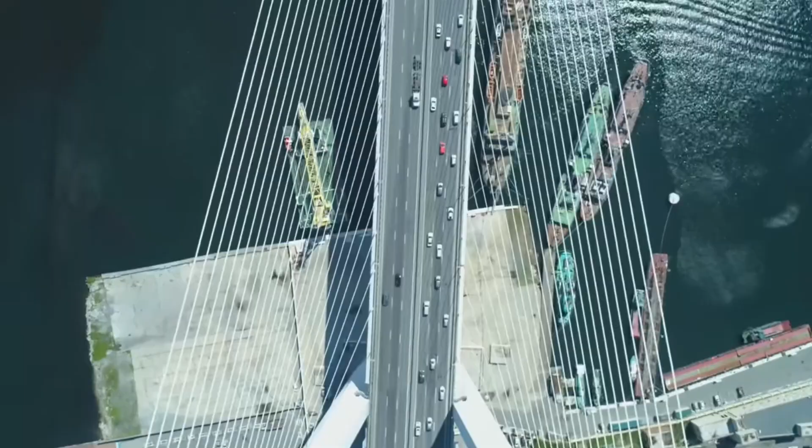While the world marveled at bridges and skyscrapers, Japan quietly did the unthinkable. It built a tunnel beneath the ocean that defied earthquakes, outlasted typhoons, and stunned billions.

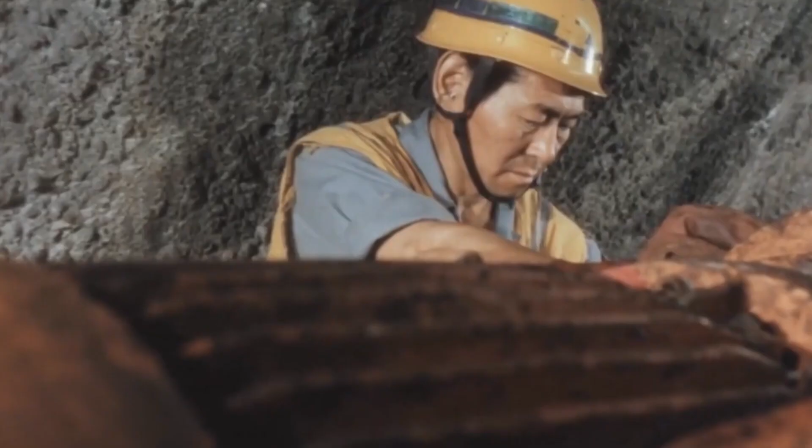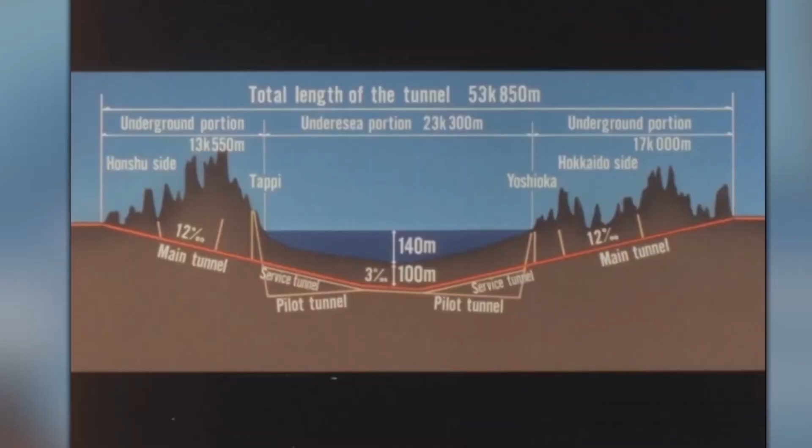Across the globe, engineers have tested the limits of what's possible, striving to defy the natural world and reshape the landscape. But in Japan, a nation shaped by the sea and forged by innovation, one underwater tunnel project has stunned the world with its audacity, technical brilliance, and unyielding precision.

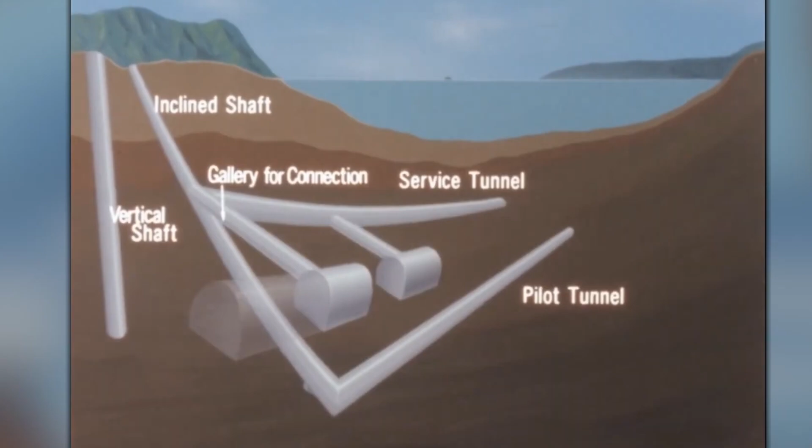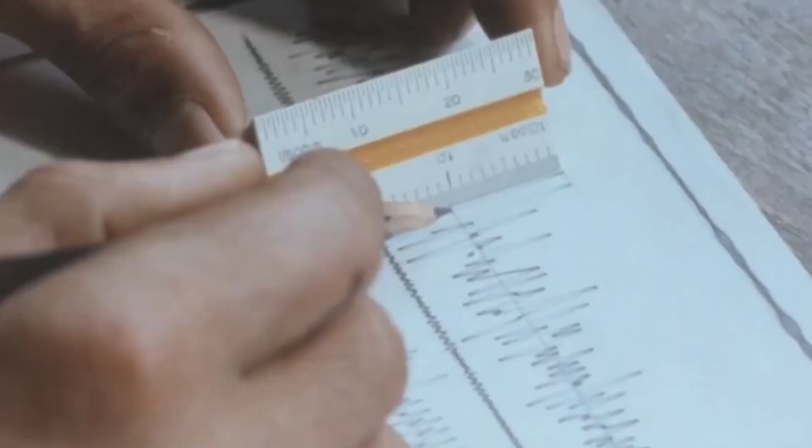At the heart of this visionary endeavor lies the ambition to connect islands, not with ferries, not with bridges, but with a permanent artery beneath the ocean itself. The idea was simple in its conception yet monumental in its execution. A tunnel that would span beneath the waves, allowing people and goods to traverse the ocean floor safely and seamlessly. This project is not just about connecting islands, it's about crafting a legacy, one that would endure the forces of nature and become a symbol of mankind's unwavering will to push the boundaries of possibility.

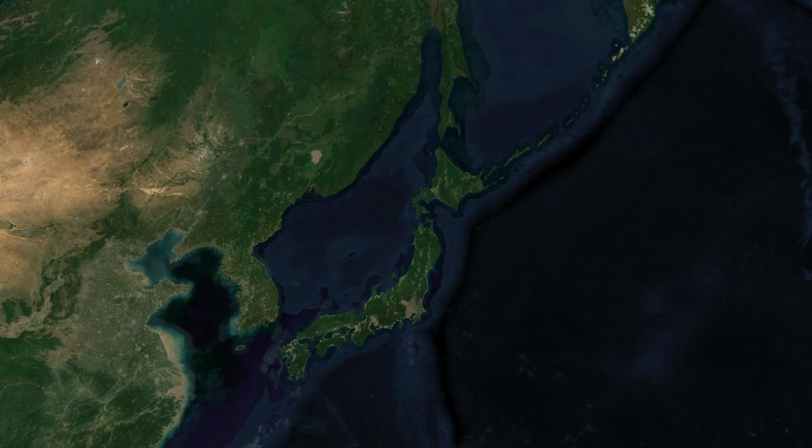This is unbelievable, but this ambition became a reality with the Seikan Tunnel, which connects the islands of Honshu and Hokkaido. Stretching over 53 kilometers, with 23.3 kilometers of it running beneath the seabed, the Seikan Tunnel was a groundbreaking achievement that stunned the world with its engineering precision and resilience.

The tunnel was built to withstand the seismic activities in the region and severe weather conditions, including typhoons, challenges that were carefully planned throughout its design and construction.

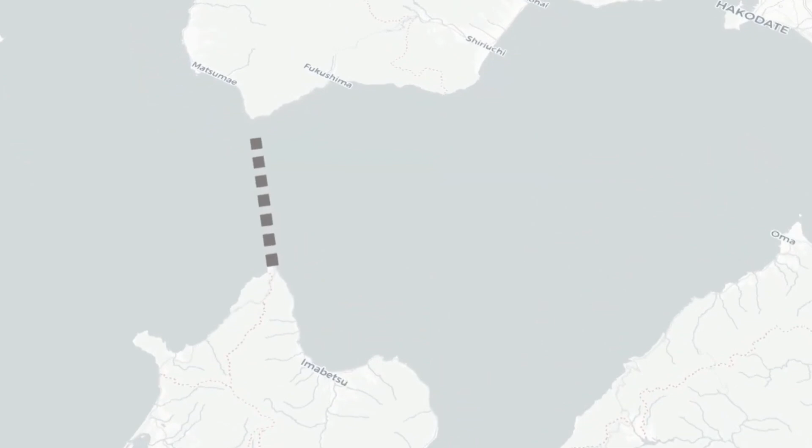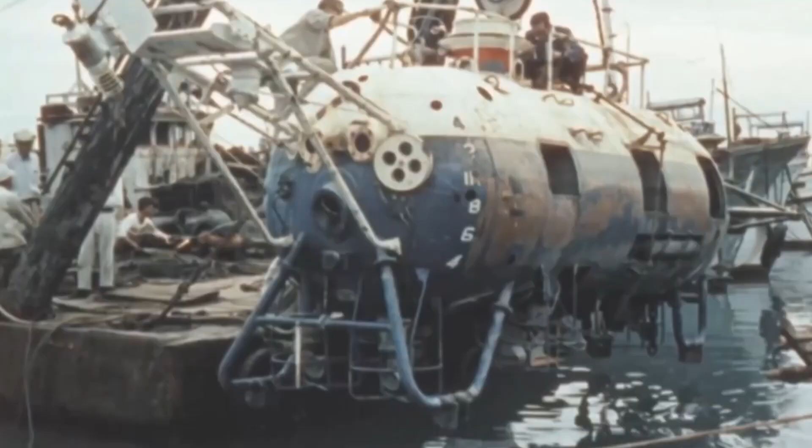Construction of this marvel did not begin with the familiar steel and concrete that often dominates monumental projects. No, this tunnel's foundation was forged in the unseen and uncharted depths of the ocean. The first step was not a matter of physical construction, but of understanding the very environment where this tunnel would rise from the ocean floor.

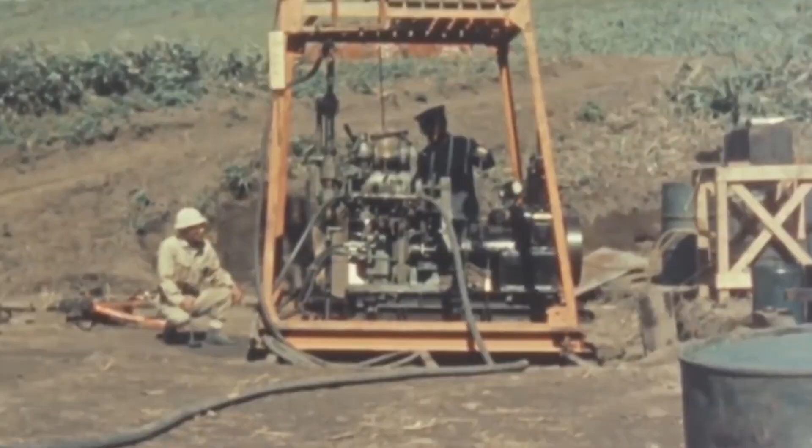Engineers and marine scientists embarked on an exhaustive campaign of surveying, utilizing advanced sonar systems, unmanned aerial drones, and state-of-the-art deep-sea robots. Together, these tools mapped the ocean floor in intricate detail, capturing every nuance of the seabed, every rock formation, every current, every sediment layer.

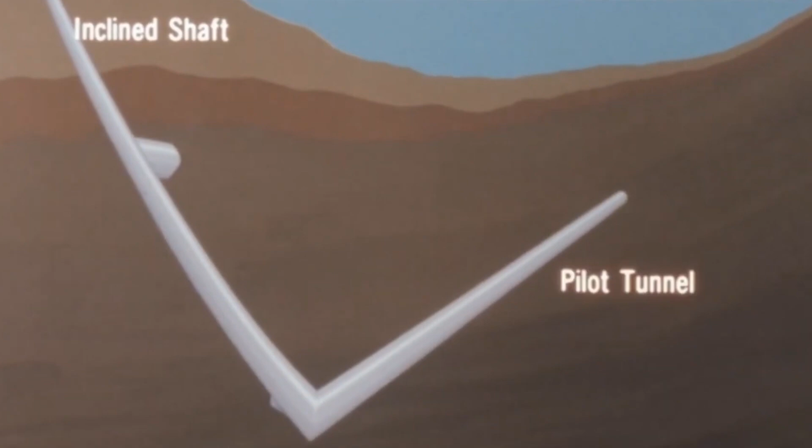The task was far from easy. The seabed, once mysterious and untamed, had to be transformed into a meticulously studied blueprint. It was only through the seamless integration of cutting-edge technology and years of research that the engineers could pinpoint the exact locations for the tunnel's foundations. This process of mapping the ocean floor was painstaking, but it laid the groundwork for what would become one of the most daring feats of engineering history.

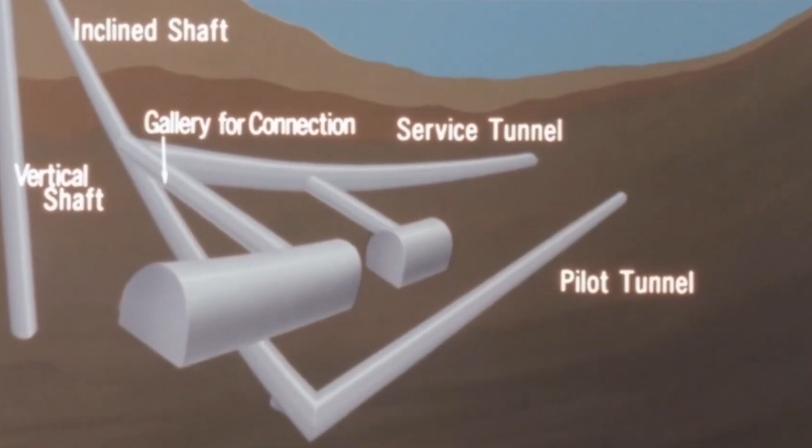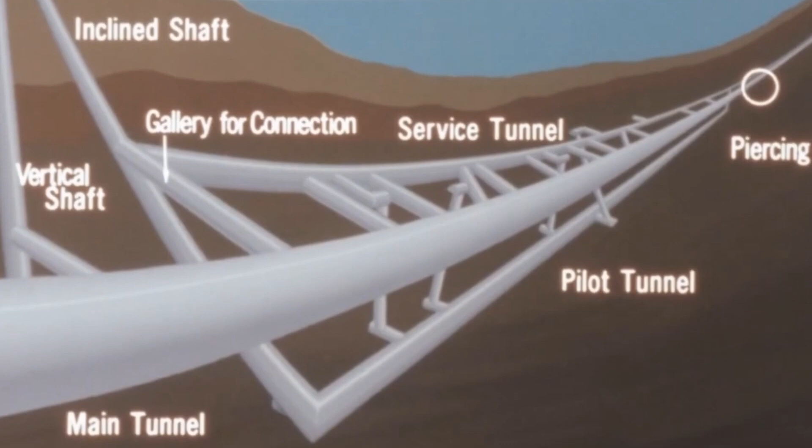Then came the first daring and bold move in this unprecedented project: laying the foundations on the seabed. The procedure, though seemingly simple, was a monumental task requiring flawless execution and a deep understanding of the forces at play beneath the waves. The engineers used massive barges to transport prefabricated tunnel segments, each one a work of art in its own right, designed not just for strength but for stability in the harsh underwater environment.

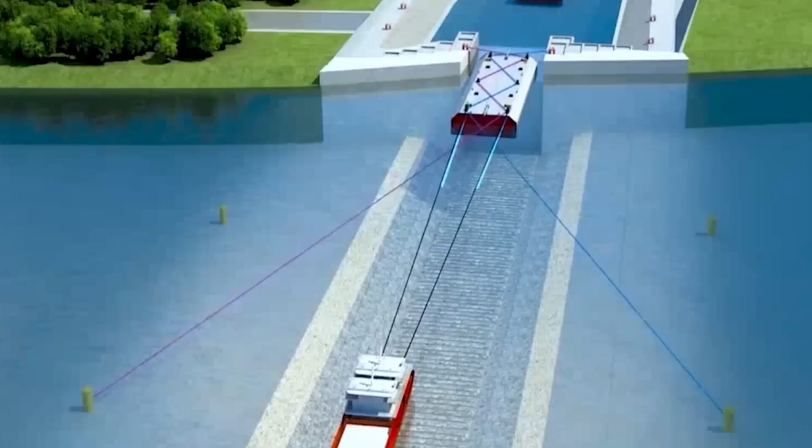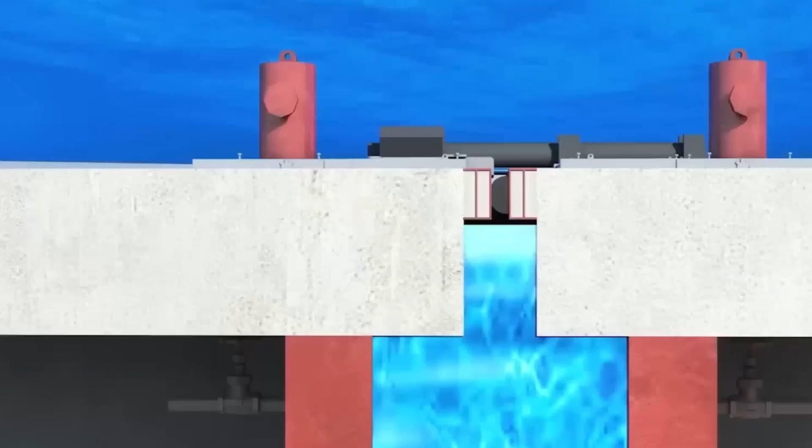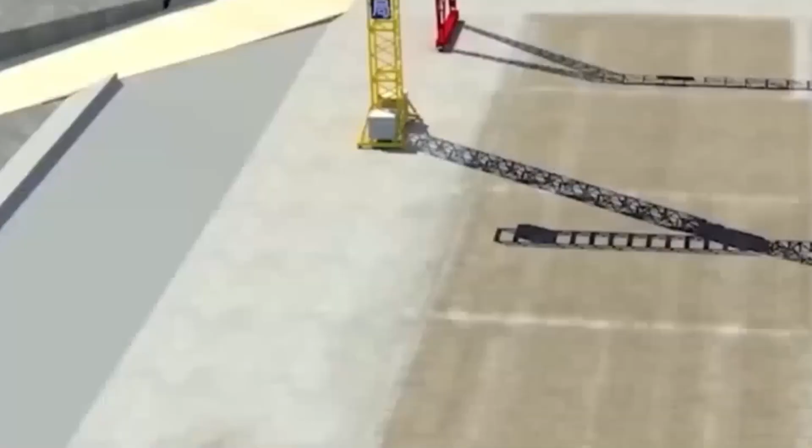Once the tunnel segments were ready, they were carefully lowered by cranes with laser-guided precision. The deployment was orchestrated by a team of expert divers, working in tandem with cutting-edge systems and high-tech laser equipment. They guided the heavy segments as they descended toward the ocean floor, ensuring that each one was placed with millimeter precision. It wasn't just about getting the segments in place, it was about perfecting the alignment, ensuring that the entire tunnel would sit flush with the foundations, ready to withstand the immense pressure of the surrounding ocean.

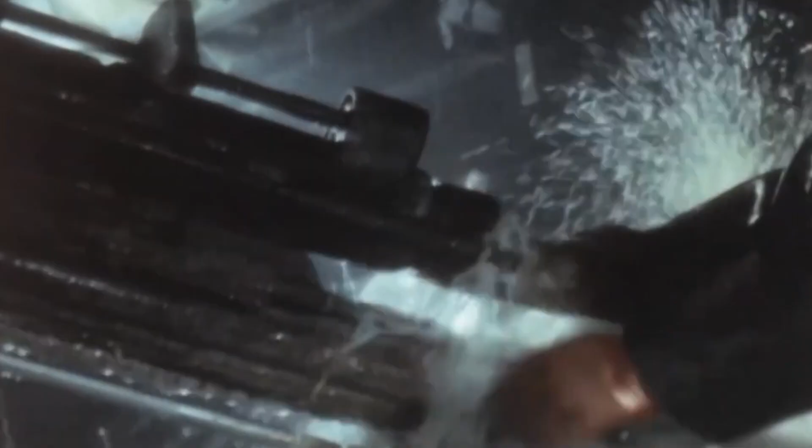The operation was nothing short of a spectacle. From above, the barges appeared as colossal creatures, slowly sinking beneath the surface with tunnel segments hanging from their massive hooks. Below, the divers swam gracefully alongside, their movements deliberate, each one part of an intricate choreography of precision. Every piece of machinery, every human action, worked in harmony as the world watched in awe. This was the moment where the ocean ceased to be an obstacle and became the very foundation of human innovation.

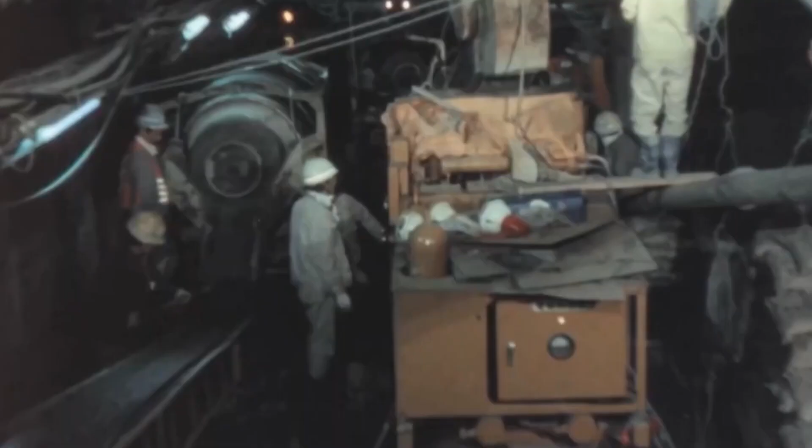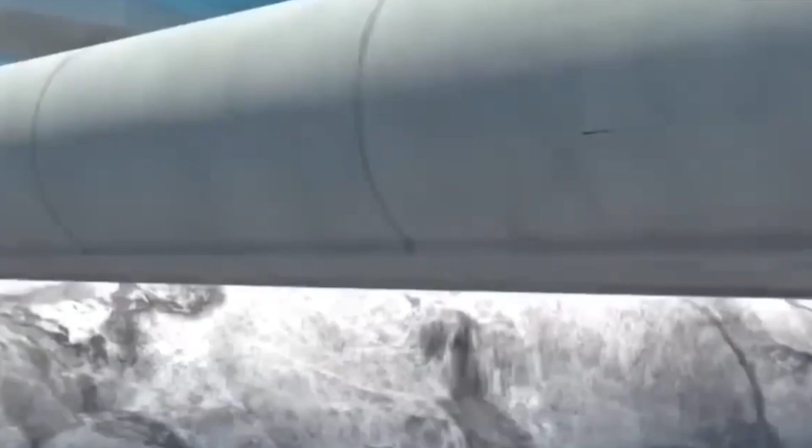Through tireless teamwork and unwavering precision, the foundations were set, each tunnel segment perfectly aligned on reinforced platforms at the bottom of the sea. What had once been an alien landscape of shifting sand and rocky outcrops was now a carefully controlled and methodically arranged base for a tunnel that would span the ocean's depths for decades to come.

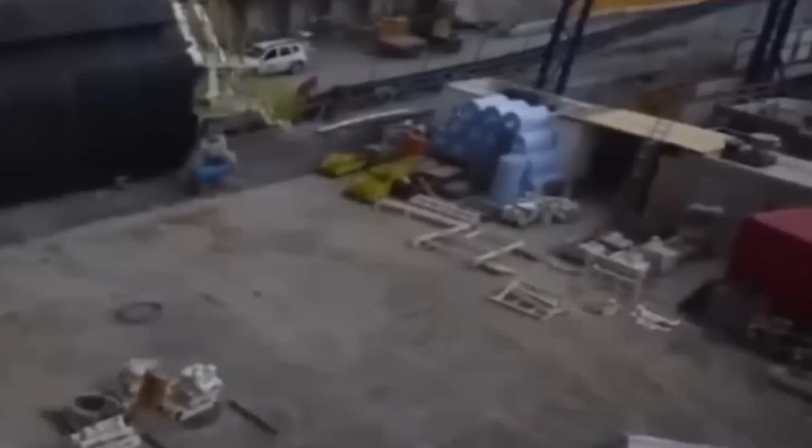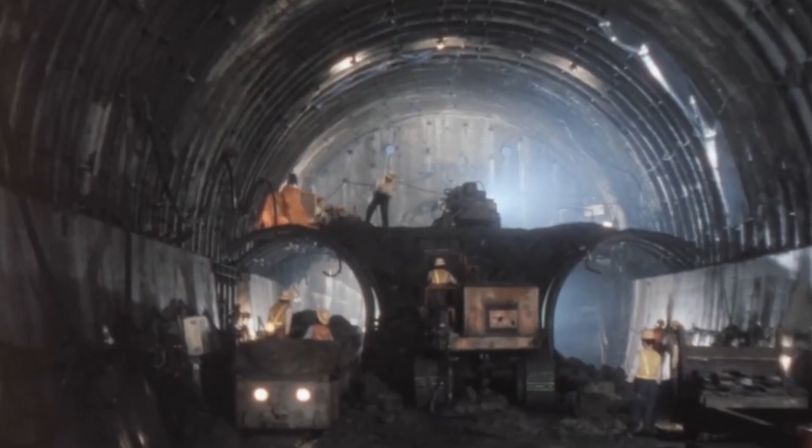As Japan's Seikan Tunnel proved, the foundation of such an engineering marvel had to be carefully laid out to endure the rugged and unpredictable nature of the ocean. The construction began with the installation of the tunnel's tunnel boring machine, which worked tirelessly through the hard rock and sandy seabed. The tunnel segments were prefabricated and then transported by rail to the tunneling site, where each segment was carefully aligned and assembled.

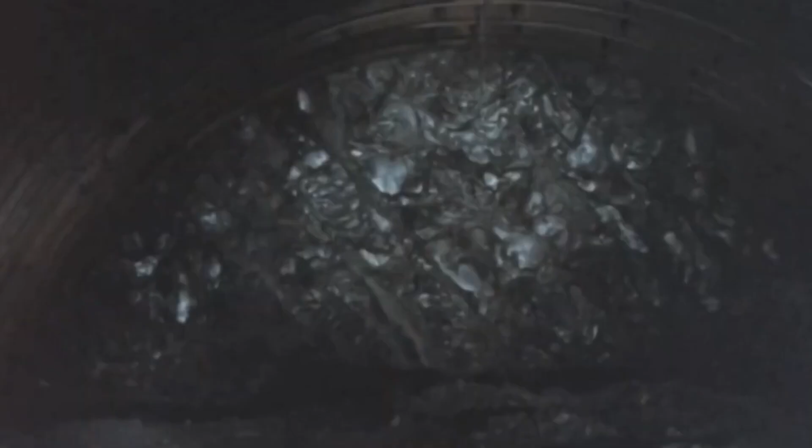As the pieces of the tunnel were submerged and aligned, engineers applied a meticulous process to ensure the structure's endurance over time. Waterproof seals, made from advanced synthetic materials, were placed at the joints where each section met.

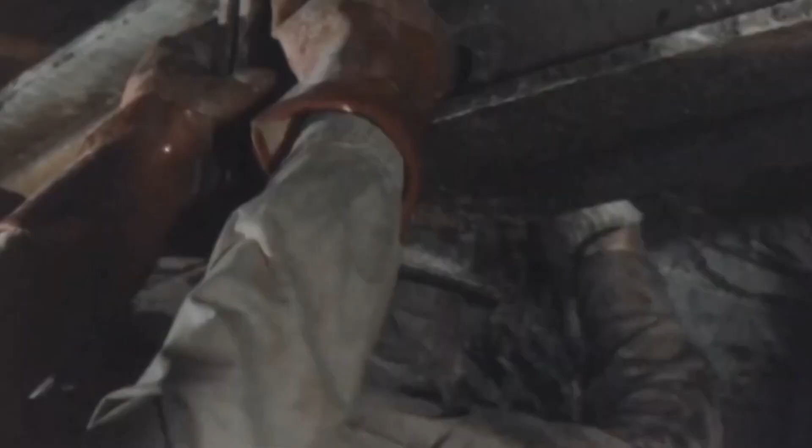These seals formed an impermeable barrier, designed not only to withstand the corrosive salt water that relentlessly batters the ocean floor, but also to guard against the crushing pressures that build up deep beneath the waves.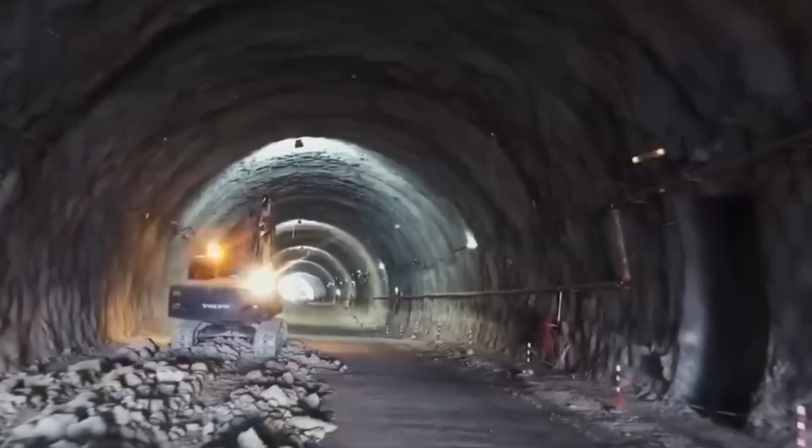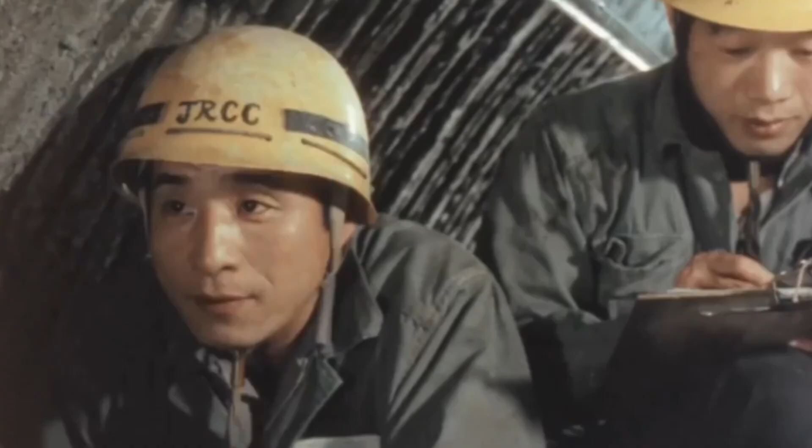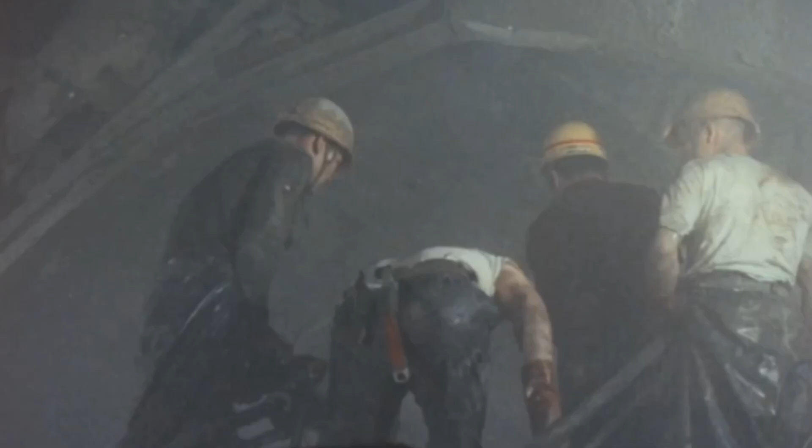The next layer of protection came in the form of corrosion-resistant concrete, specially engineered to endure constant exposure to the sea's volatile elements. This concrete was a sophisticated blend of polymers and silica formulated to ensure longevity and resilience against the powerful forces of nature. The concrete was applied in layers, enveloping the tunnel's structure like armor, preserving its integrity for decades to come. With each application, the material bonded with the underlying surface, creating a seamless, unified shield.

But a tunnel is not just a structure, it is a vital lifeline. A symbol of progress and innovation that carries with it the promise of connection and convenience for future generations. Beyond its sturdy exterior, the tunnel is a living, breathing system designed to stand the test of time.

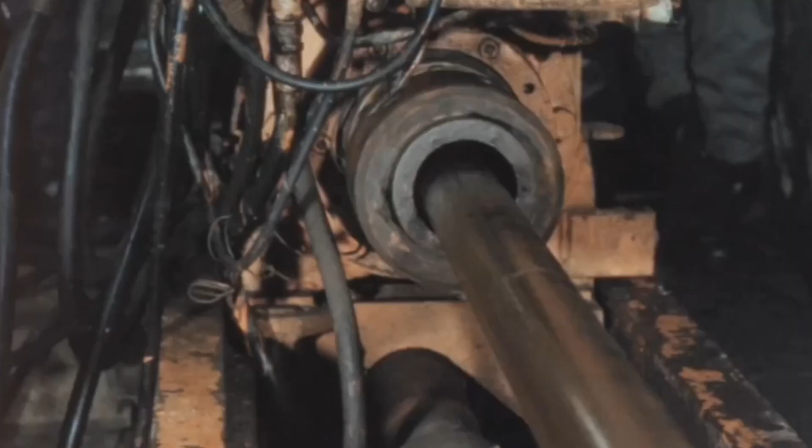Once the external structure was in place, the focus shifted inward. Inside the sealed shell, engineers meticulously installed the systems necessary to make the tunnel a fully functional passageway for vehicles and passengers. These weren't mere pipes and wires. They were intricate veins and arteries of the tunnel, ensuring its smooth operation for years to come.

State-of-the-art lighting systems were installed, providing illumination throughout the tunnel to guide travelers through its depths. The lighting was not only functional, but strategically designed to create an environment that would be both welcoming and practical.

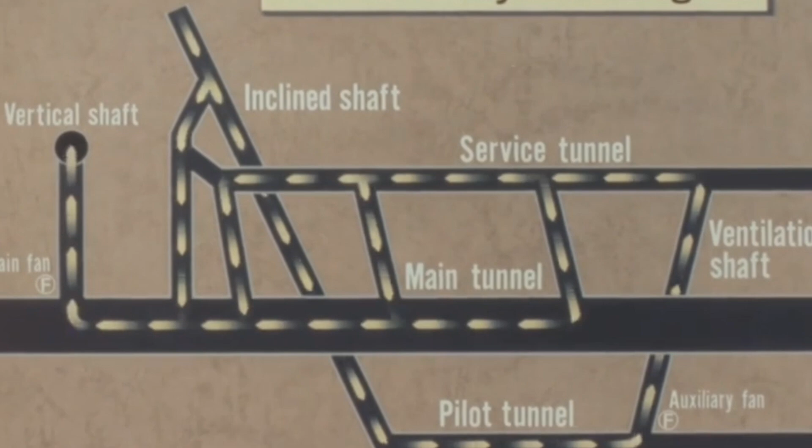A crucial part of this tunnel's design was its ability to react and adapt to changing conditions. Engineers installed a network of redundant sensors, each one designed to monitor a different aspect of the tunnel's operations.

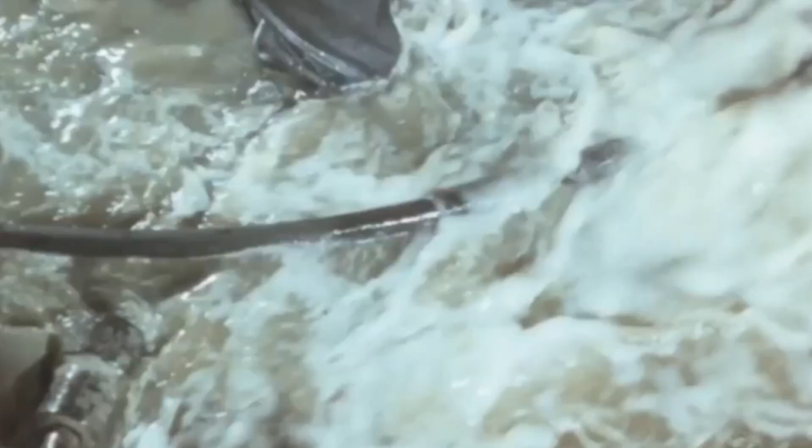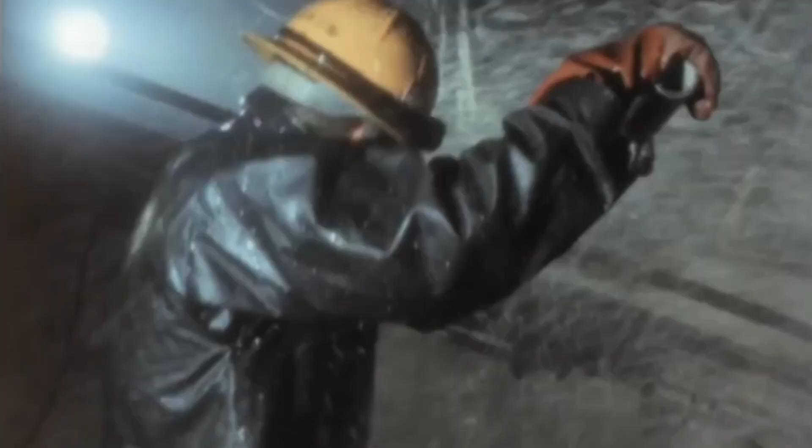These sensors tracked air quality, ensuring that the tunnel maintained breathable conditions. They also monitored water leakage, detecting even the smallest breaches in the waterproof barriers. Structural integrity was continuously assessed by sensors embedded within the concrete, which provided real-time data to engineers monitoring the tunnel's performance. Additional sensors tracked vehicle flow, ensuring that the tunnel could accommodate the growing demands of future transportation without compromising safety or efficiency.

The tunnel was more than a mere passage. It was an intelligent, self-regulating environment that anticipated needs and responded to challenges before they could become problems.

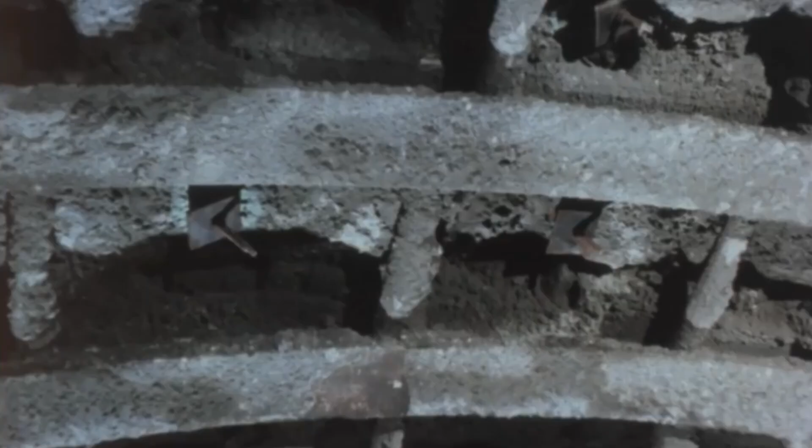No great feat of engineering is complete without rigorous testing, and this tunnel was no exception. The final test was as ambitious as the project itself.

Simulated earthquakes, generated by applying external pressure at varying intensities, were used to evaluate the tunnel's ability to withstand seismic activity. It wasn't enough to simply build a tunnel that could survive under normal conditions. This tunnel had to be capable of withstanding the worst that nature could throw at it.

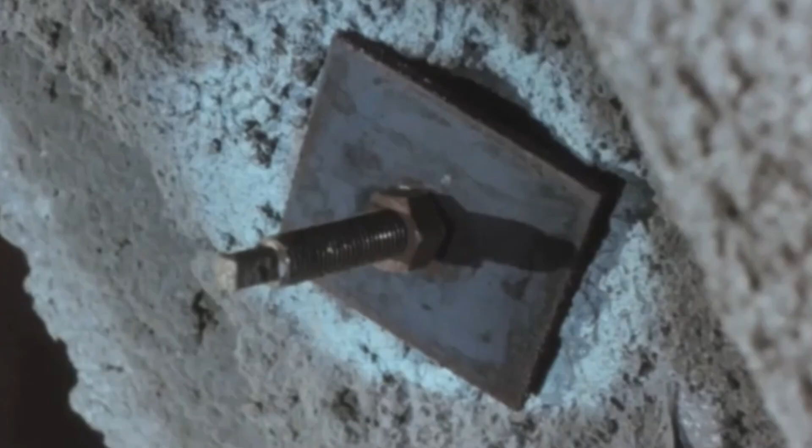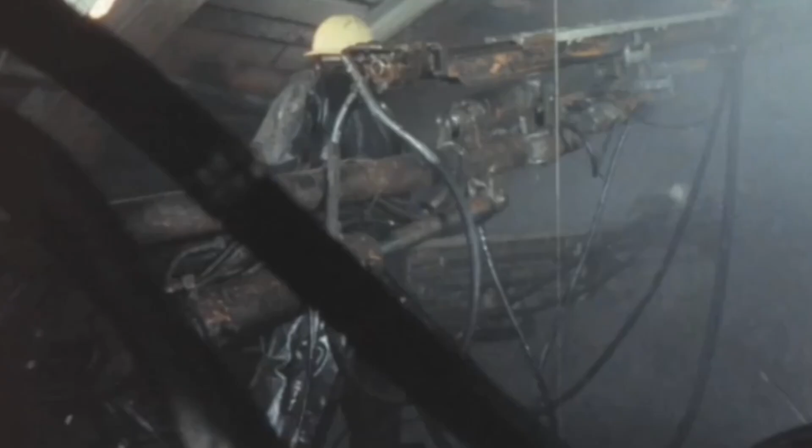As the tremors coursed through the tunnel, the structure flexed, bending and shifting under the pressure, but never breaking. It responded with the quiet resilience of a living organism adapting to the forces around it. The structure held firm, its joints and seals remaining intact as it absorbed the shocks with ease. It was a testament to the tunnel's design and durability, proof that it could withstand the unpredictable nature of the ocean and the powerful forces of the Earth's crust.

When the final test was complete, the results were conclusive. The tunnel had passed every challenge with flying colors. It was more than just a structure of stone and steel. It was a modern marvel, capable of withstanding the test of time, natural disasters, and the ever-evolving needs of future transportation.

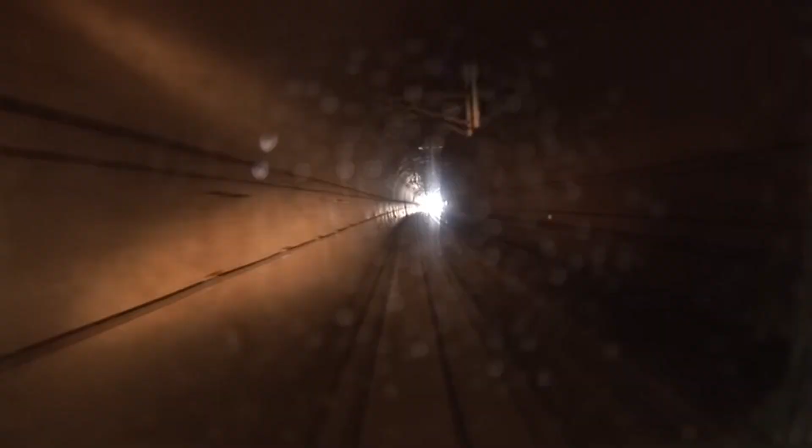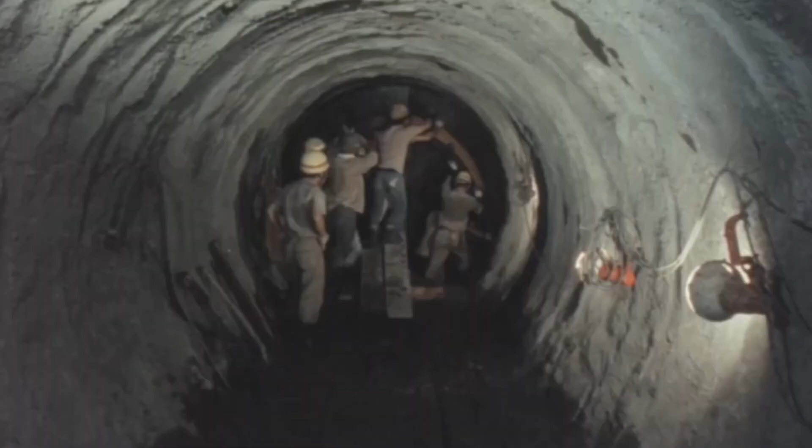More than a feat of engineering, it reflects Japan's commitment to overcoming the natural challenges posed by its geography, its archipelagic structure, and susceptibility to seismic activity. Built to withstand earthquakes, typhoons, and the test of time itself, this tunnel stands as a testament to Japan's resilience in the face of nature's unpredictable forces.

Climate change has accelerated the need for more sustainable, adaptable infrastructure. The tunnel serves as both a practical solution to an ever-expanding transportation network and a visionary answer to the future of urban mobility in a world increasingly defined by environmental challenges.

What was once regarded as an impossible dream is now a thriving artery of movement. Beneath the waves, it hums with life, a metaphor for Japan's persistent drive to innovate, redefine the limits of possibility, and position itself at the forefront of the global engineering landscape.

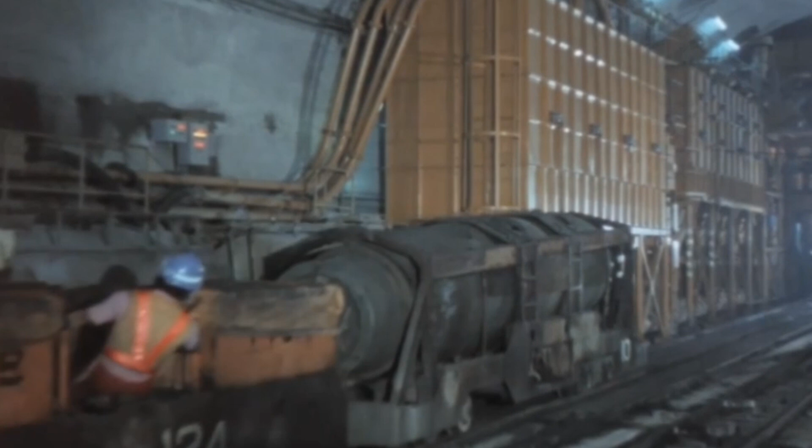This tunnel does more than connect two distant points. It intertwines the destinies of Japan's islands, fosters economic growth, and embodies a harmonious balance between technology and nature. It is quite literally a beacon of modern Japan, guiding the nation toward a future that is both sustainable and interconnected. Japan's underwater tunnel is merely one chapter in the country's rich legacy of engineering marvels.

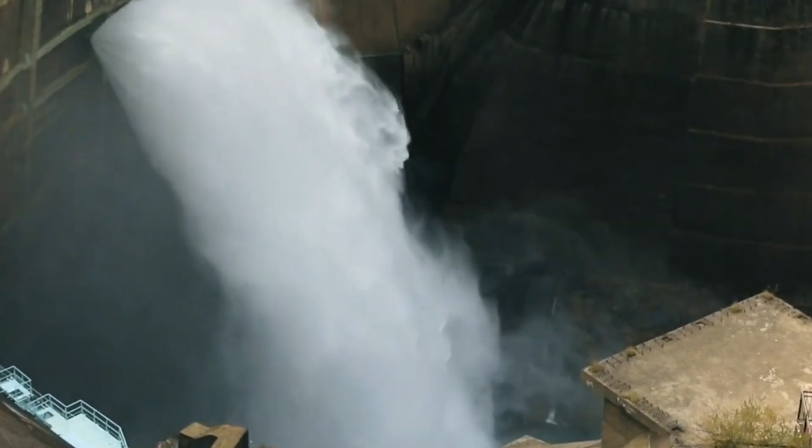The same ingenuity that made this tunnel a reality can be seen in Japan's mastery of other large-scale projects, from the breathtaking bridges that span its storm-swept bays to the dams that tame the fierce rivers cutting through its mountains. These structures speak to a nation that has long understood the necessity of turning geographic adversity into architectural triumph.

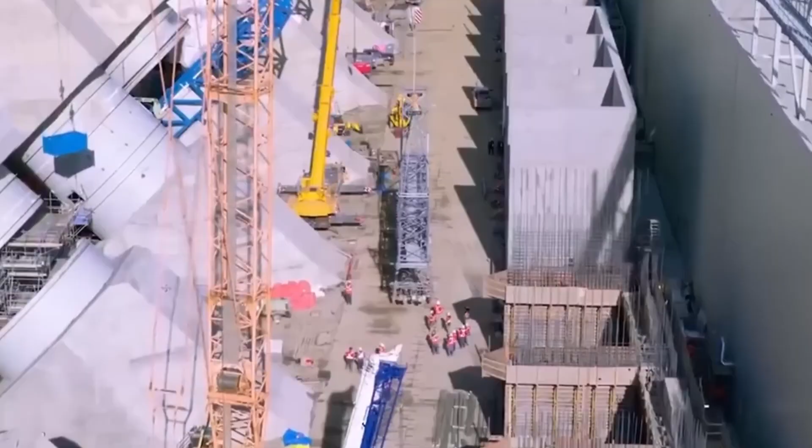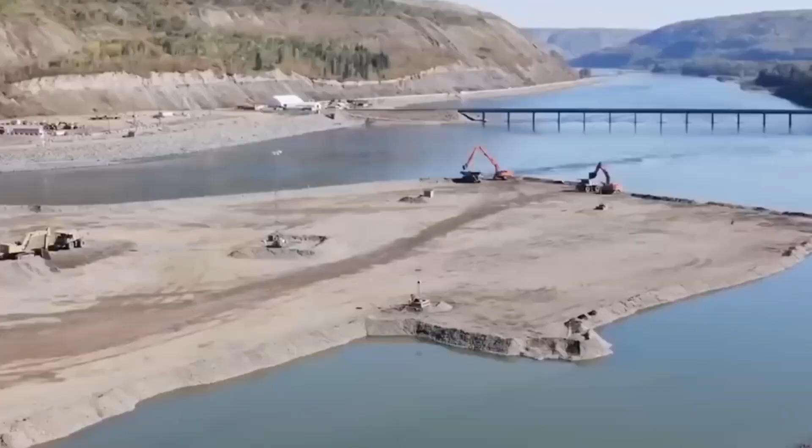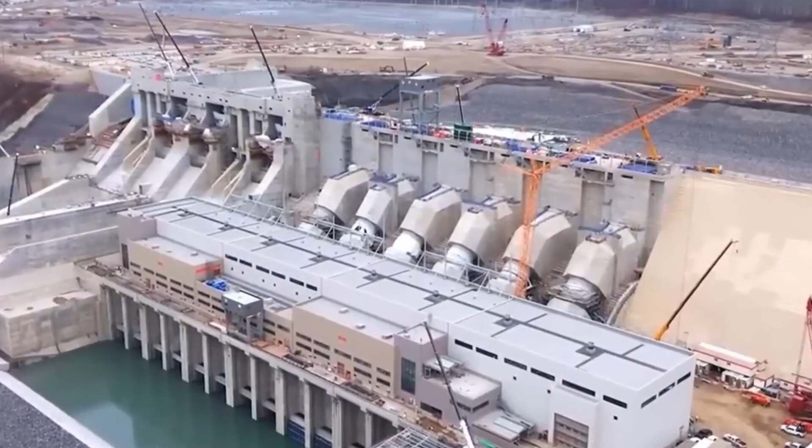Consider Japan's innovative approach to dam construction, a process that mirrors the ingenuity required for its underwater tunnel. Before a dam can be built, the force of nature must be diverted. Temporary barriers are strategically placed to control the flow of turbulent rivers, creating a dry foundation for the construction of the dam. Workers then carve out stable, solid ground, laying the groundwork for what will become a massive, indomitable structure.

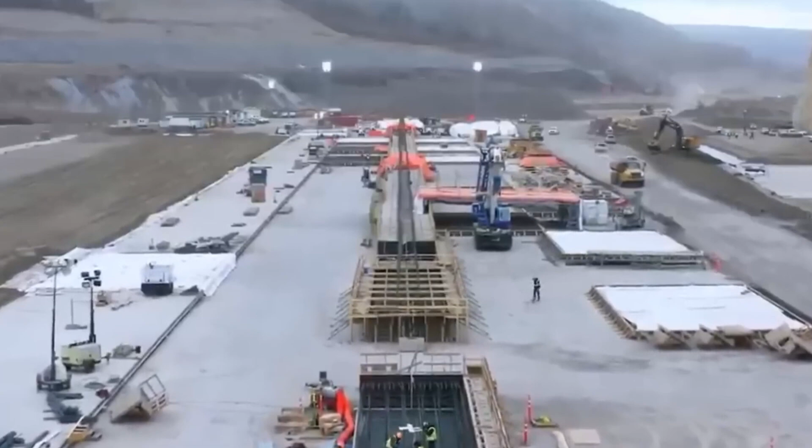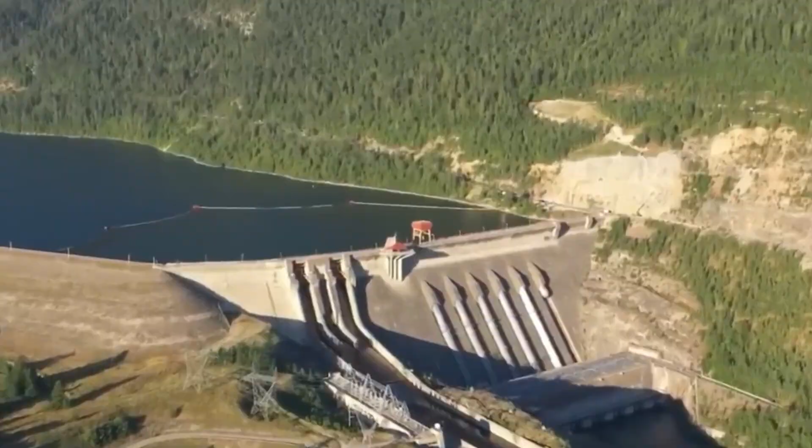The dam's body begins to take shape with the placement of massive concrete blocks, each one meticulously designed to withstand the unimaginable pressure of thousands of tons of water. These blocks are lowered into place with precision, aligning perfectly to form a seamless, enduring structure that stands as both an engineering marvel and a safeguard for surrounding communities.

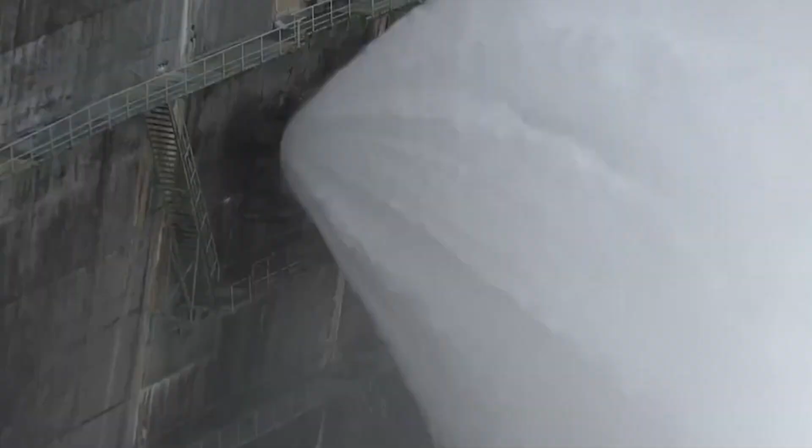Once complete, the dam is transformed into a source of power. Turbines and drainage systems are installed to harness the energy of the flowing water, turning what was once a barrier into a powerhouse of clean, renewable energy.

This transformation of nature into infrastructure is more than just a construction process. It's a reflection of Japan's relationship with its environment. The nation has continually sought to work with, rather than against, the forces of nature, creating systems that are as resilient as they are functional.

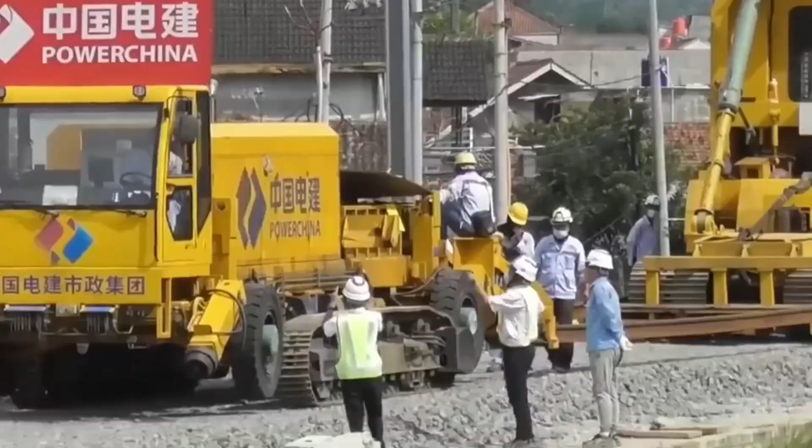Whether it's the massive concrete pillars of a bridge that sways gracefully with the winds, or the tunnel that resists the shifting tectonic plates beneath the ocean, Japan's engineering feats serve as a reminder of what can be achieved when human innovation meets nature's challenges head-on. Through projects like these, Japan has proven time and again that even in the face of the harshest geographical conditions, engineering excellence can not only survive, it can thrive.

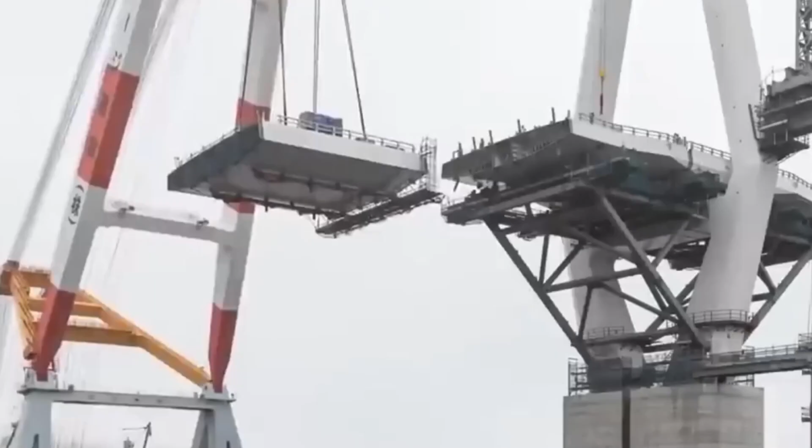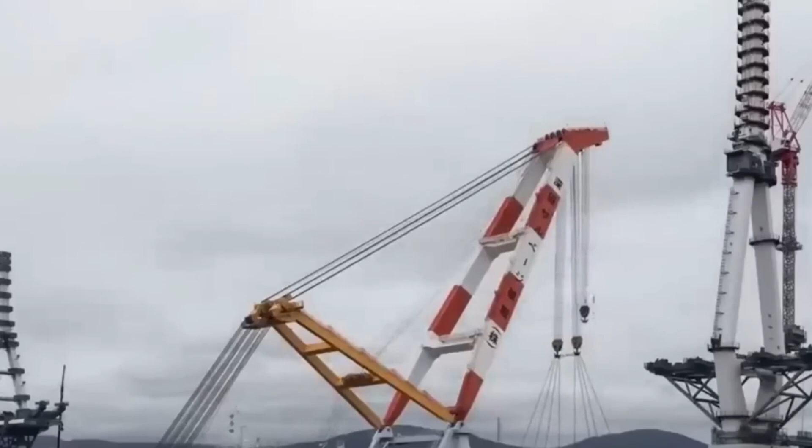Modern bridges in Japan are no less extraordinary. Deep in the seabed, foundation piles are driven with seismic isolation systems built in. Towering piers rise next, followed by steel beams and tension cables, laid with help from robotic cranes. Each bridge is an exercise in balance, distributing wind, water, and weight into a fluid aerodynamic whole.

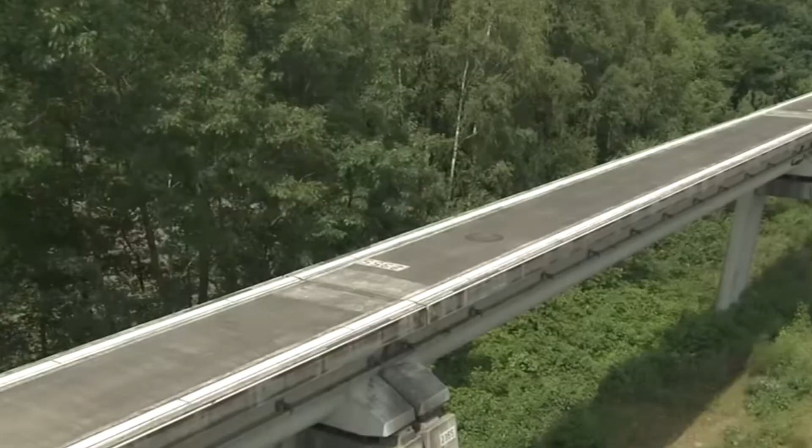Inland, Japan's rail construction exemplifies speed and accuracy. Machines now lay track with near total automation. Rails are positioned, fastened, and secured with laser-guided precision, reducing labor costs and increasing safety. These systems have turned weeks of work into hours and have become global benchmarks in transportation.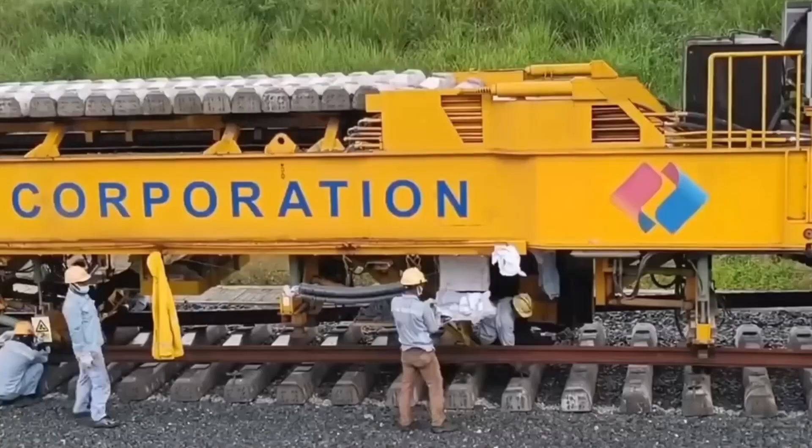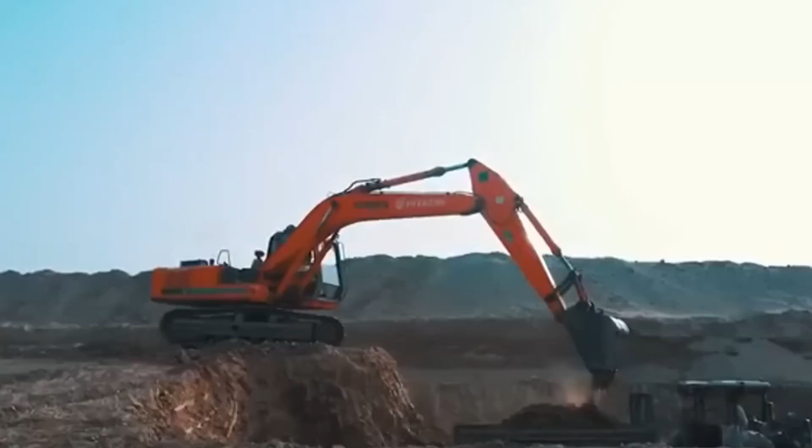River projects too are approached with harmony in mind. Water is temporarily diverted, foundations are set, and reinforced structures guide the flow with sensors and automation keeping constant watch. Roads follow a similar path. Sublayers are compacted, asphalt is poured and rolled, and safety infrastructure is added, all using environmentally considerate technologies.

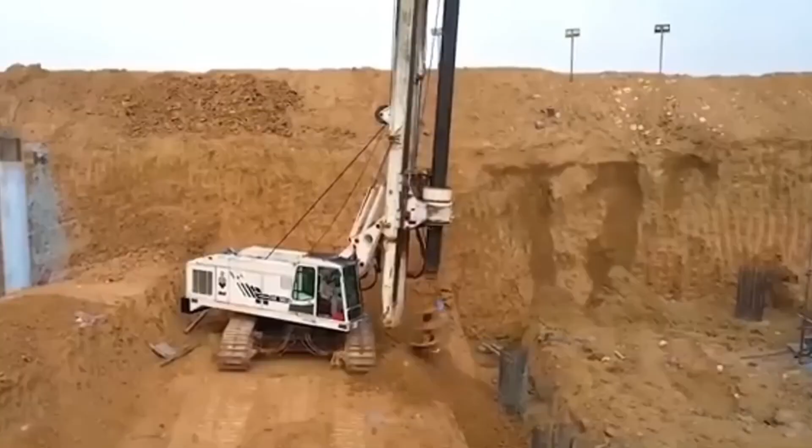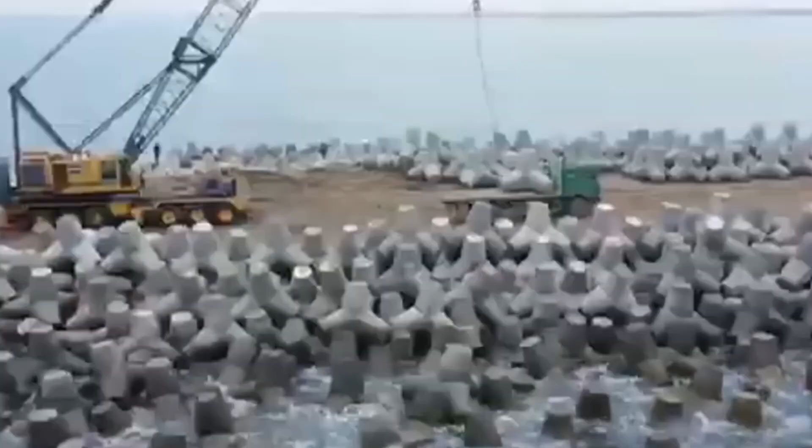Even the coastal edges of Japan are shaped with care. Seawalls built from precisely arranged boulders and covered in reinforced concrete act as shields against tsunamis and erosion. Each stone is placed at a specific angle to absorb and scatter wave energy. It is not just engineering, it is protection in physical form.

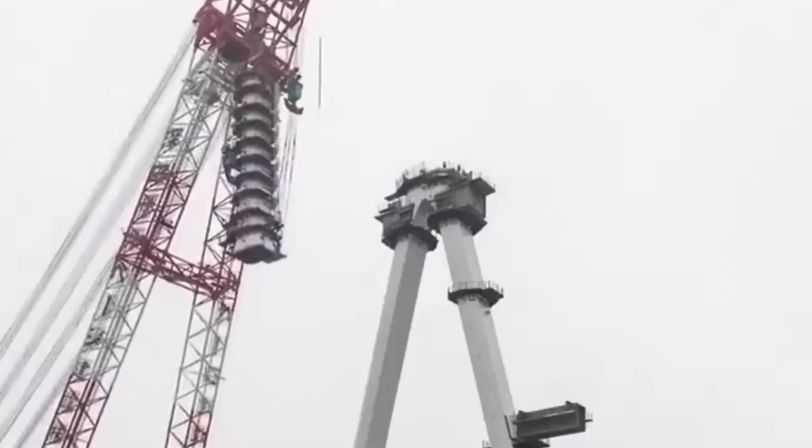Japan's engineering community is not only shaping the skyline with towering structures and breathtaking bridges, but is also at the forefront of eco-friendly and rapid construction methods that are transforming how we think about building the future. Their innovations blend tradition with technology, pushing boundaries while considering the environmental impact.

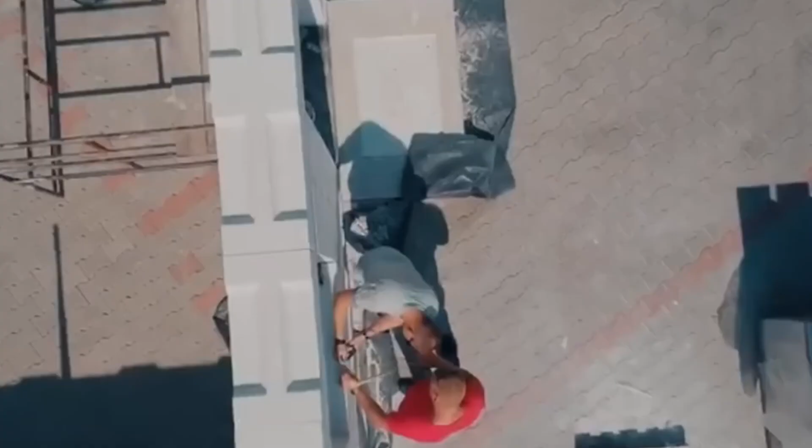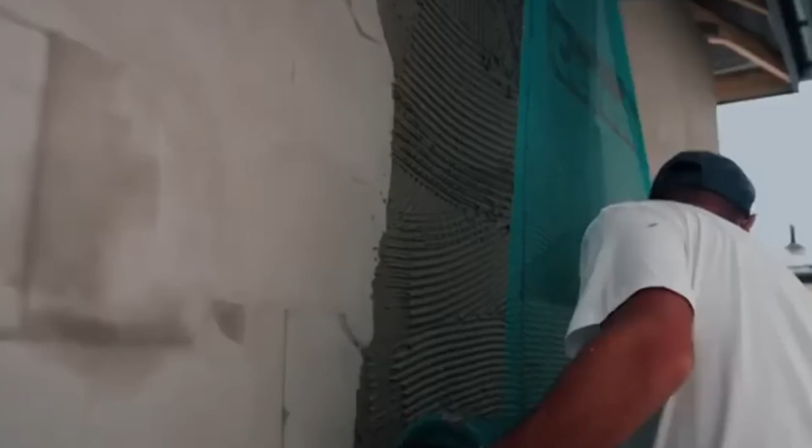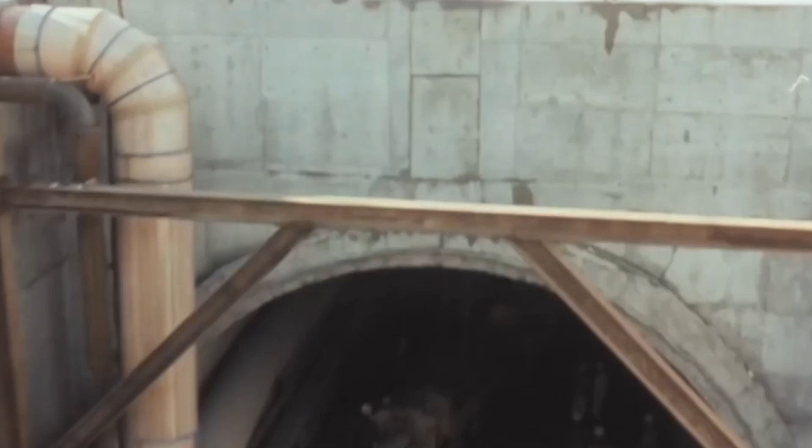One such breakthrough is the use of modular concrete blocks. These blocks, designed to interlock seamlessly without the need for mortar, represent a significant departure from conventional construction. They reduce construction time, minimize waste, and eliminate the reliance on harsh chemical adhesives, making them not only efficient but environmentally responsible. However, no project epitomizes Japan's engineering prowess quite like the Seikan tunnels.

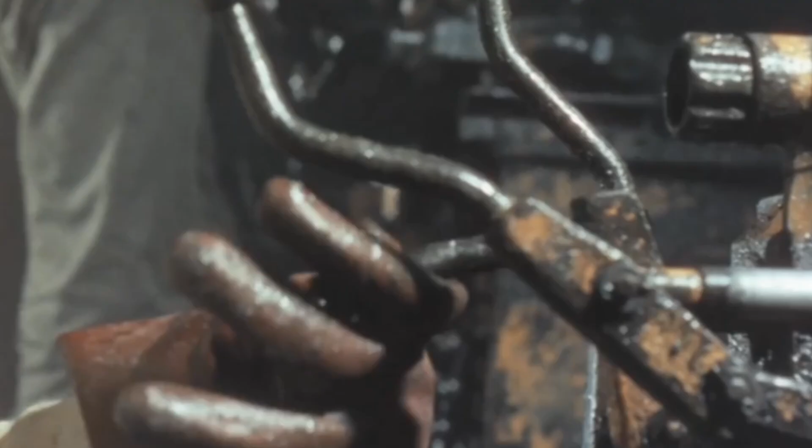Once deemed an impossible dream, the concept of constructing tunnels that connect islands through the deep, unpredictable ocean rock has been brought to life through relentless innovation. The project is a monumental achievement in civil engineering, overcoming the staggering challenges posed by underwater construction. These tunnels are not simply passages through the sea, they are symbols of human resilience and ingenuity.

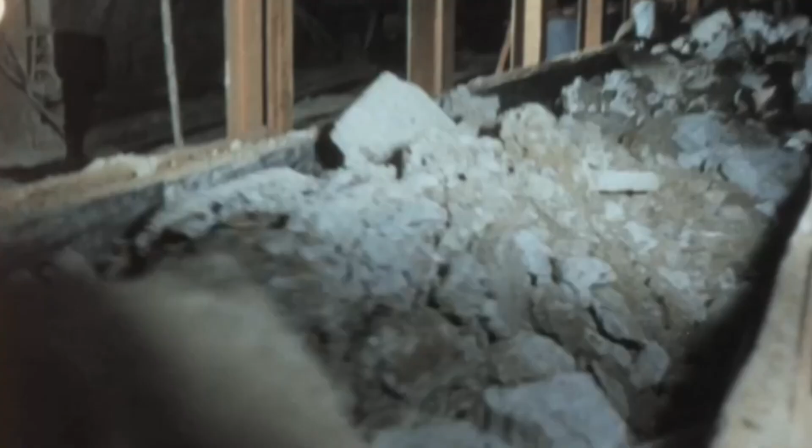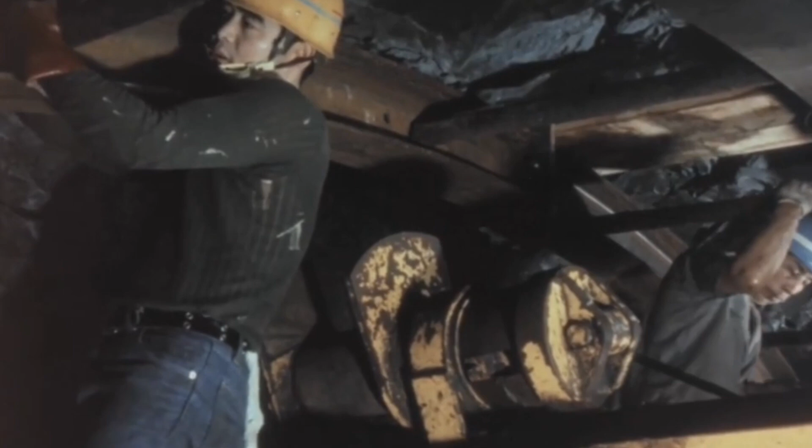Engineers face the daunting task of navigating through layers of ocean rock with unpredictable pressures and constant exposure to the relentless forces of nature. The construction process itself involves a staggering level of precision and foresight. Workers must contend with the ever-present threat of seismic activity, unpredictable currents, and the immense pressure of the water above. Yet, through cutting-edge technology, they have been able to build tunnels that can withstand these challenges and function for decades without compromising safety or stability.

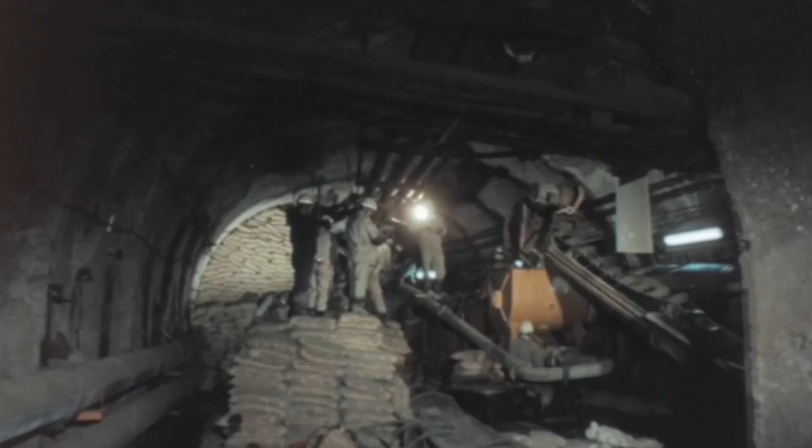The tunneling process relies on sophisticated machinery that can cut through rock while minimizing environmental impact, and the use of reinforced, pressure-resistant materials ensures the durability of the structure.